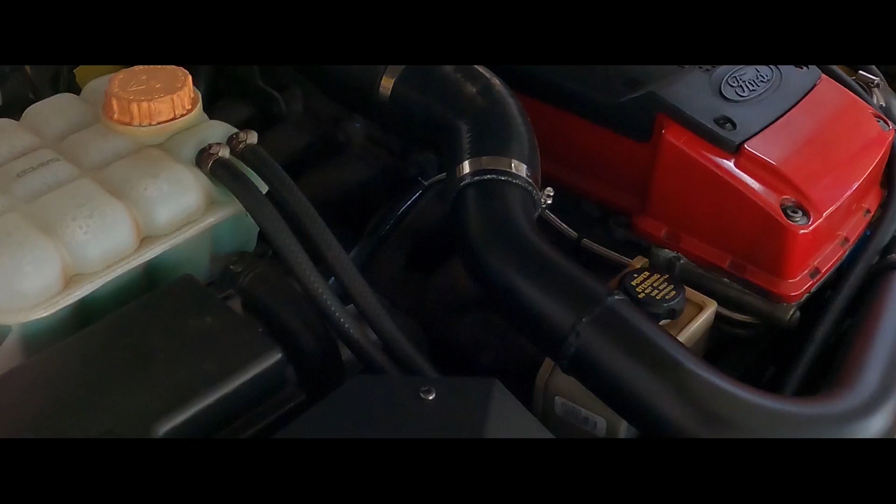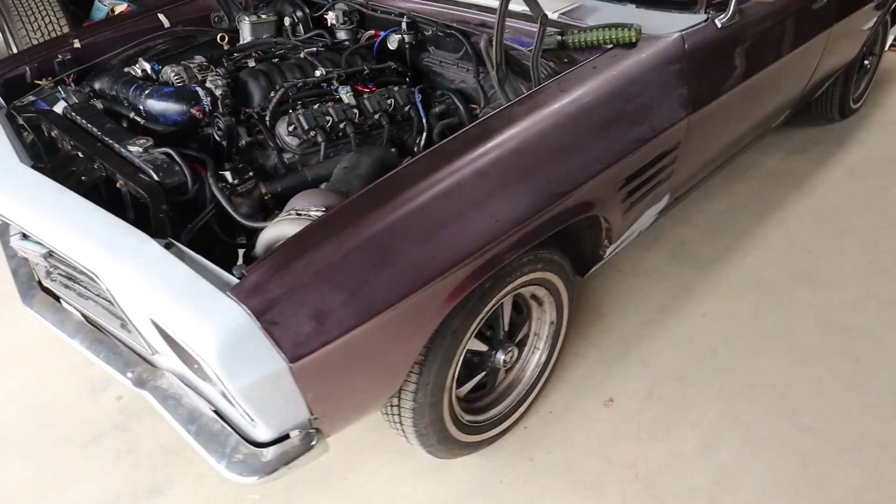Righto guys, back here this morning. As you can see, Mighty Purple's off the hoist, which is a good start. So the boys obviously had a pretty busy night and got it sorted. And here we are, ready to go on the dyno this morning.

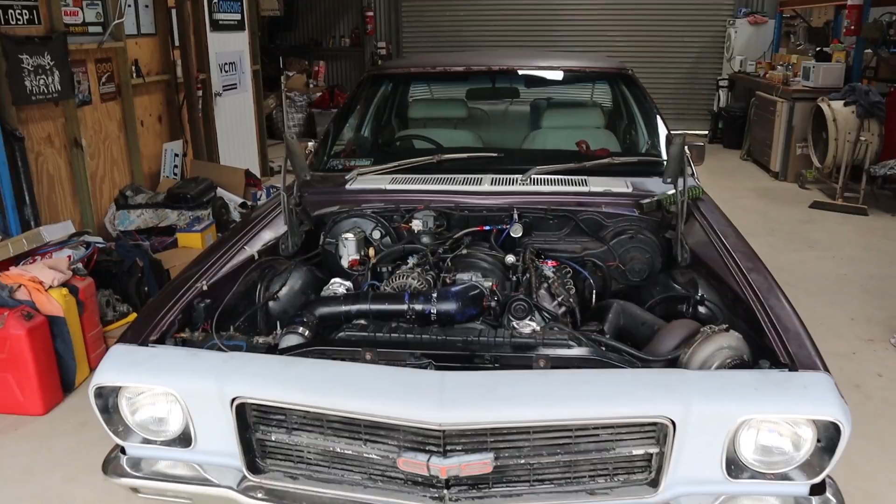Anyway, have a quick bite to eat, bit of brekkie. As you can see, it's a lovely foggy Sunday morning. Apologies to our neighbours, but unfortunately things just go the way they go sometimes. We generally are pretty good with our neighbours, very empathetic. We always only operate within a certain time frame and try to keep noise to a minimum outside of that. So it's not all bad, it just is what it is every now and then. But I'll get some footage of it doing a few runs before I head to lunch.

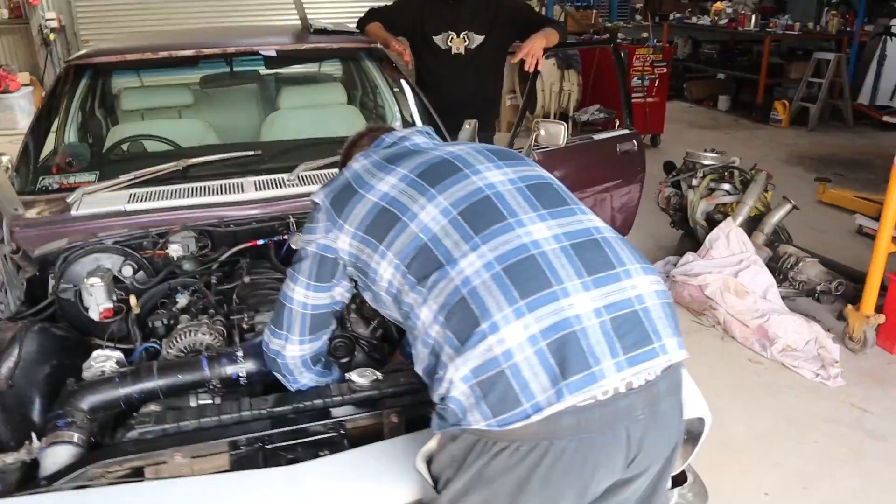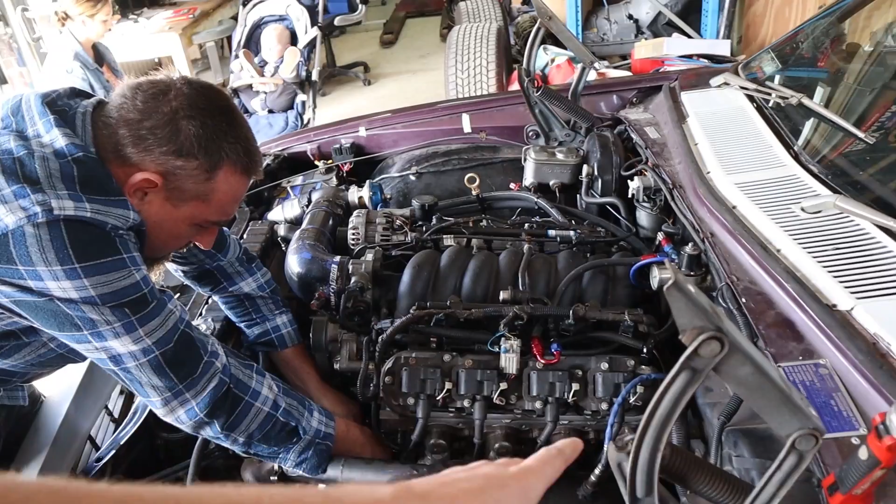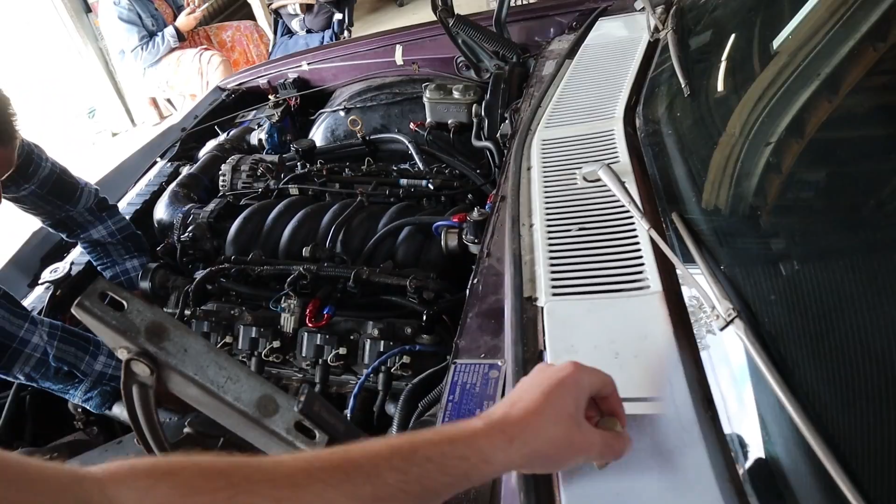Alrighty guys, so we're working through a few things with the new VZ PCM, having a few issues with things like cam signal and a few other things. We got it to start and run last night, but it's not happy, doesn't like starting. We're having a bit of trouble because it's Gen 4 - as Stuart explained at the start, we're using the front cam sensor in the front plate like a Gen 4 would, but using the LS2 early style trigger with one trigger so it will run the LS1 PCM, no worries. So just having a bit of trouble working through that stuff. The boys are working through that.

Also having a bit of trouble with the gearbox - well, not with the gearbox, just error codes. It's come up with all sorts of weird codes related to the gearbox, being 4L80. One of them for some reason is the trans range, which is basically the park, reverse, neutral - not so much the lockout, but it tells position, tells it what position it's in. And it's cracking it about that, saying it's out of range.

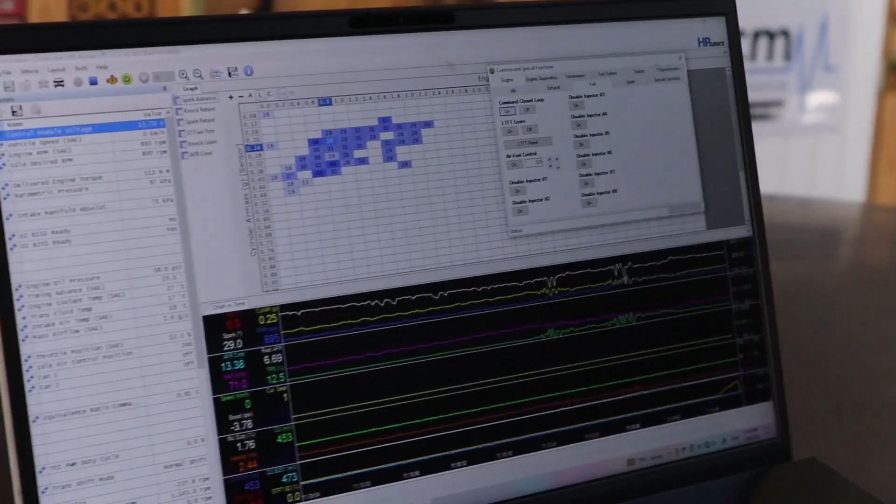Yeah, I was trying to figure out what was rattling. It was the bumper. Yeah.

This is recording, Max, because I don't know what the hell I'm doing. So here we are, just a quick update before we get it on the dyno. We've sorted out these stupid error codes. It won't do the crank CASE relearn because of some TPS issues, and basically we're at the point now where Stuart's just said, you know what, send it anyway. So that's what we're doing. We did find an old perished fuel line under the back here that feeds to the surge tank, so we've fixed a fuel leak there. We're just doing a final check on the oils, and that's it.

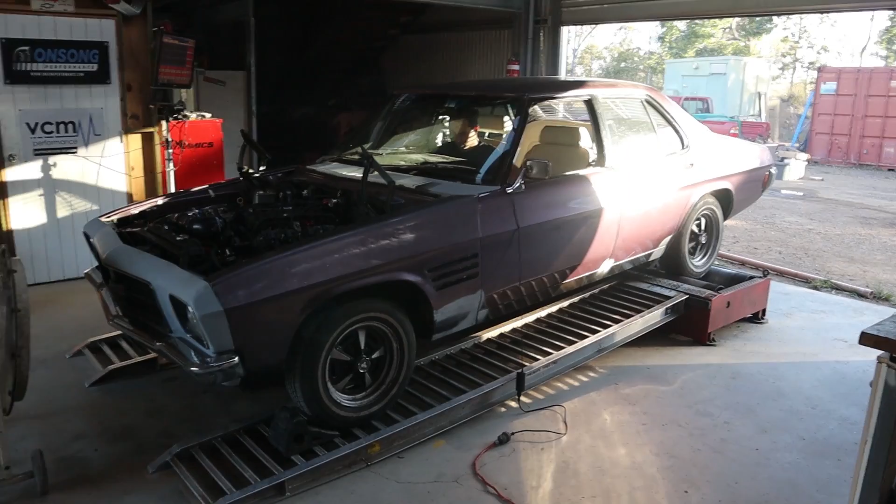Hijack the camera here, guys, Rex is just making a few changes for me on the tune. We've got a bit of oil and stuff still burning off this thing, but it'll keep doing it for a while.

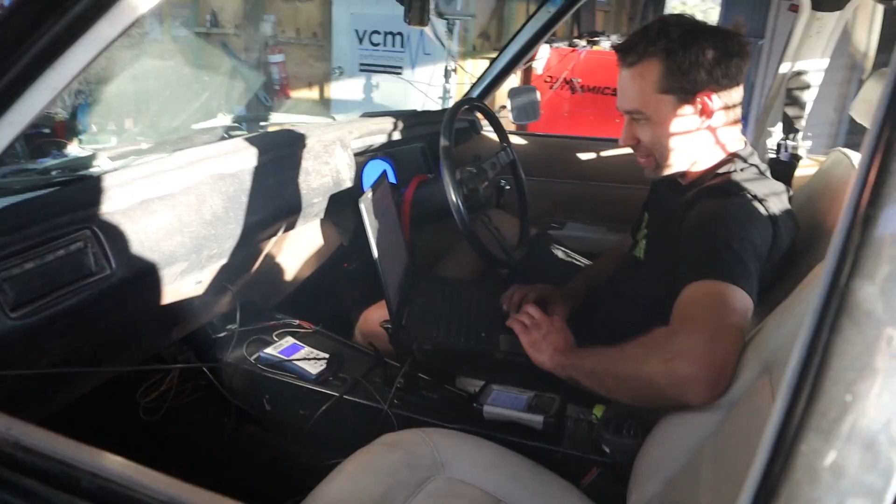Stole your camera. Hey? I stole your camera. Yeah, that'll be good. Max will be happy. I'm a bit busy. What's that? I'm a bit busy, but still in there.

Do we know what the base boost is yet? No, I saw 13.8 that time. So, creeping there, that's alright. Hopefully it tops out there. Look, as long as it's under 20 as the base boost, we're fine.

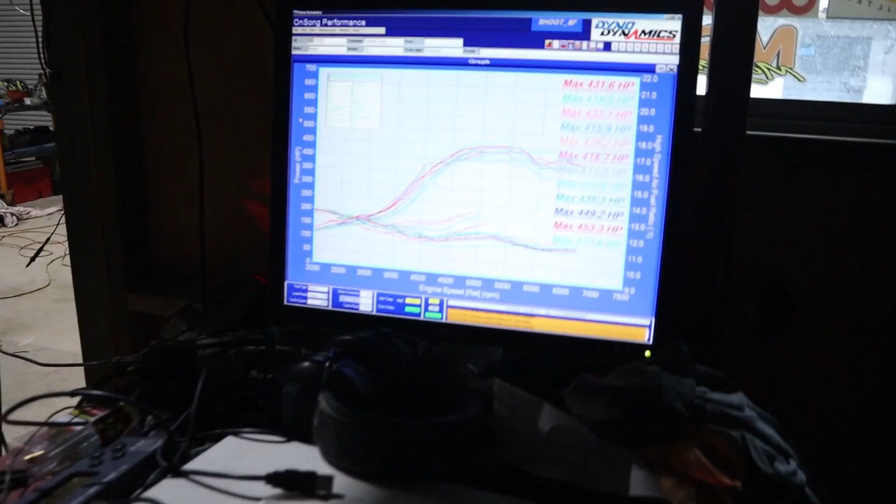So we're just throwing a couple extra degrees in it, see how that goes. At the moment it's loving it, every time we put it in there it just keeps jumping in horsepower. We've just got to do 2 runs though - one to get some temperature in it because it's such a big housing on a little motor, and then the second one gives us the power.

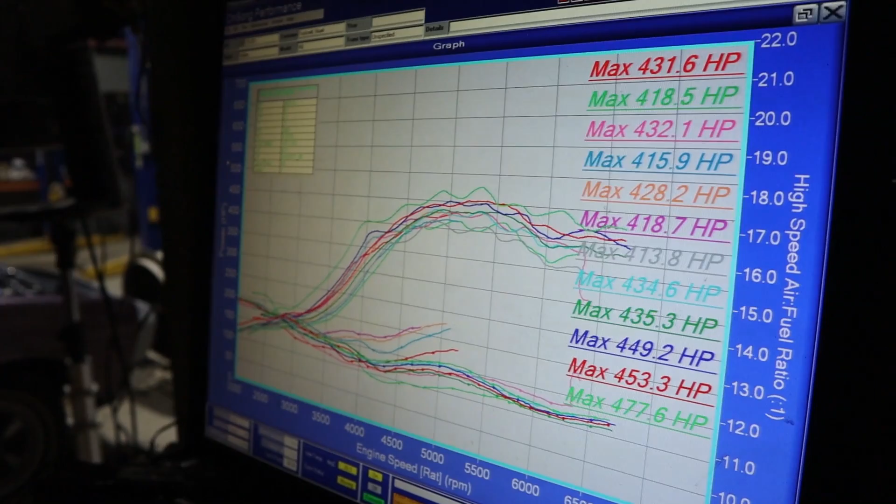We went lean. Try again.

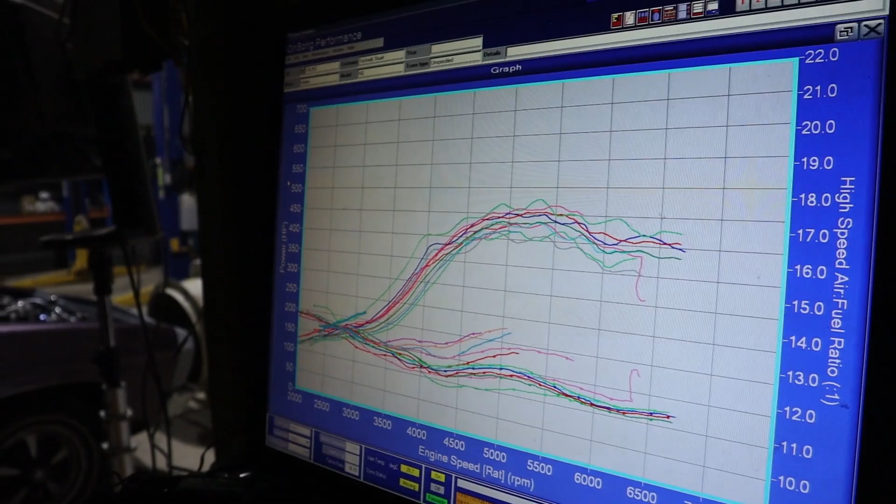Alright, here we go. I'm not sure how much you can actually see in the dark here. It's about 7:45 now on a Sunday night, so this is going to be our last ride. Just thought I'd give you a quick update - Stuart's been filming some of the runs, so here we are with our setup.

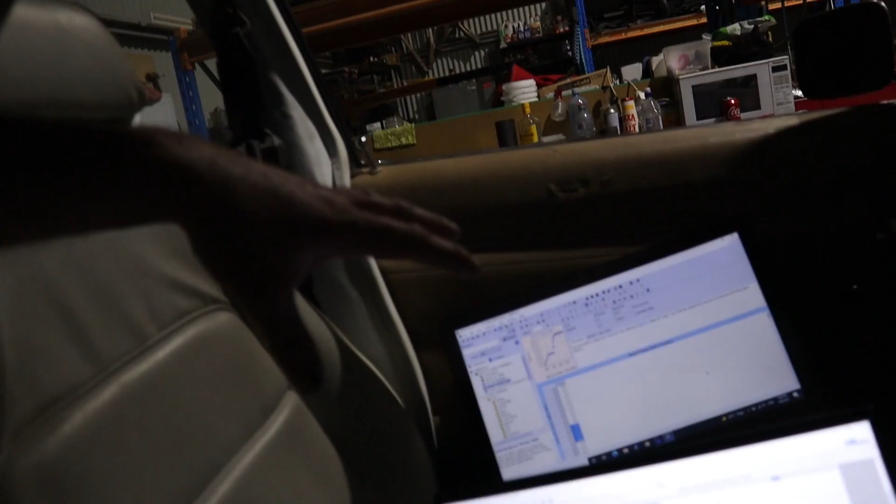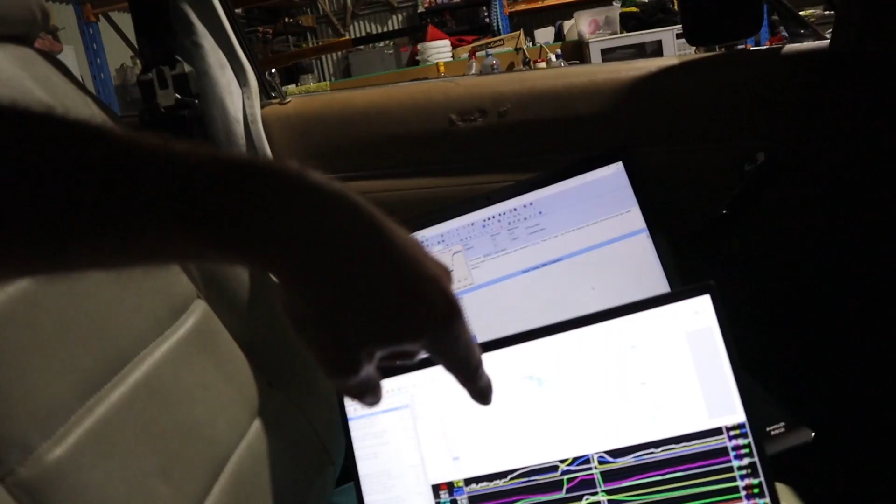It's too hard using EFI Live, trying to do - I won't go into the long version of what we're trying to do here - but it's actually worked out better for me to use our tuning software, HP Tuners, as a scanner for when we're doing runs, and just use Stuart's EFI Live to flash the tunes back in.

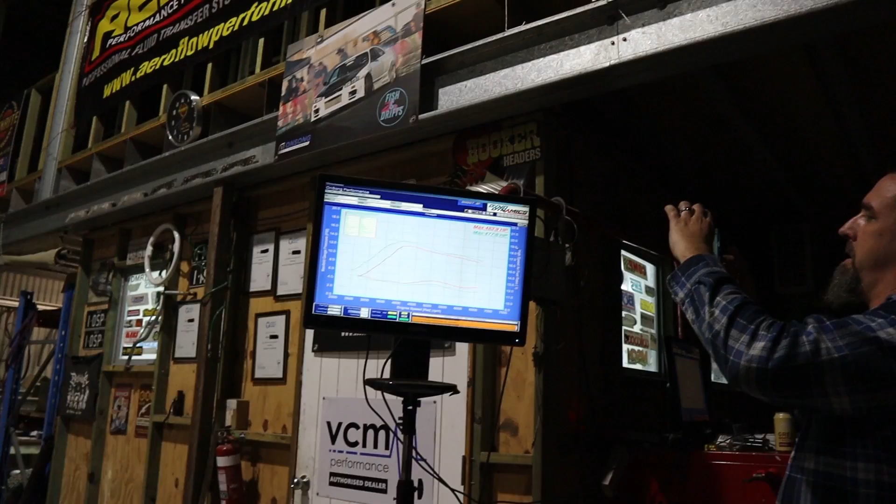Because it's late at night, we're pretty much at the point now, as you can see, our last run there - if I can work out how to zoom - the last one's the red one. There we go. So we've gone 477. That last run was 483 on less boost, which is because we started throwing timing in.

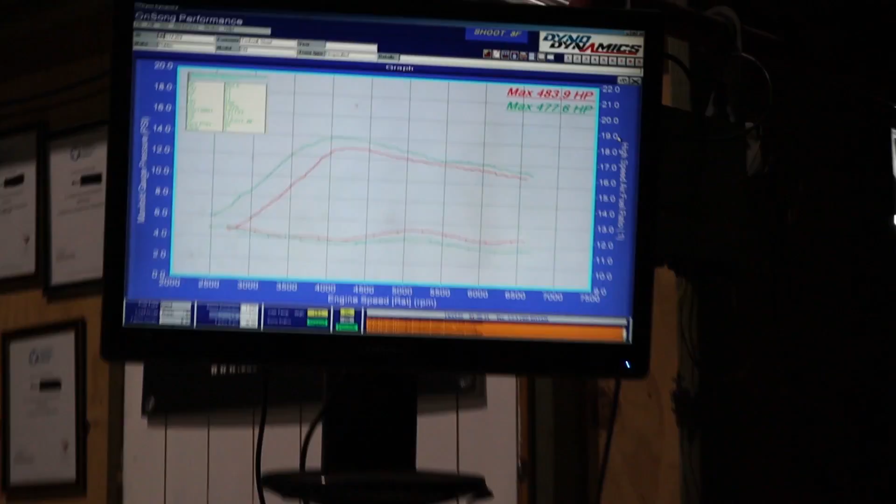As some of you might be aware, as we put timing in, the exhaust gas heat is going to drop a bit because it was quite retarded, which is why we get a bit more efficiency. So we're making more power, less boost.

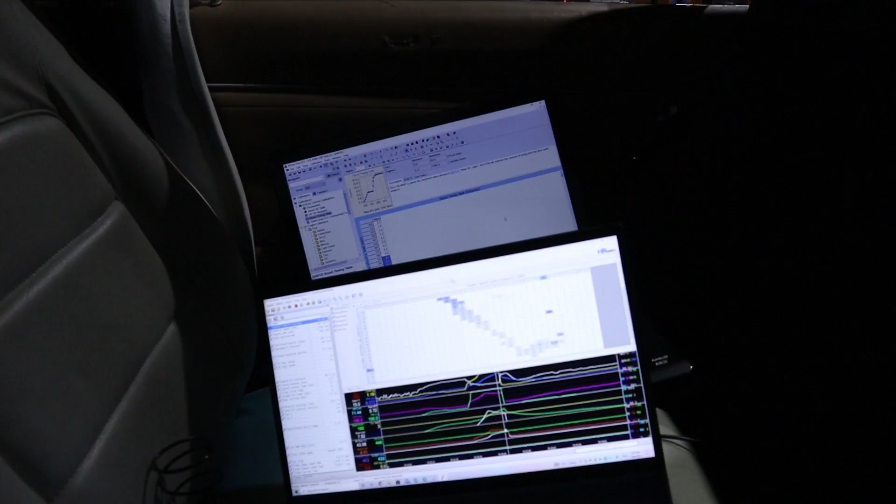Unfortunately, we're just running out of time. This is only on gate pressure. So this is going to be our last 2 runs for this time, and then Stuart will come back eventually and we will finish it off and actually lean on this thing a little bit harder. So here we go for the last couple of runs, I'll bring you along for the ride.

Hey Stewie. Hey mate, how you doing?

Alright, so I'm doing my best to film this. As you can see, there's a lot going on. We've got an onboard wideband here, I've got 2 laptops going, so I'm going to do my best while I run the dyno, and we'll try and keep this thing under control.

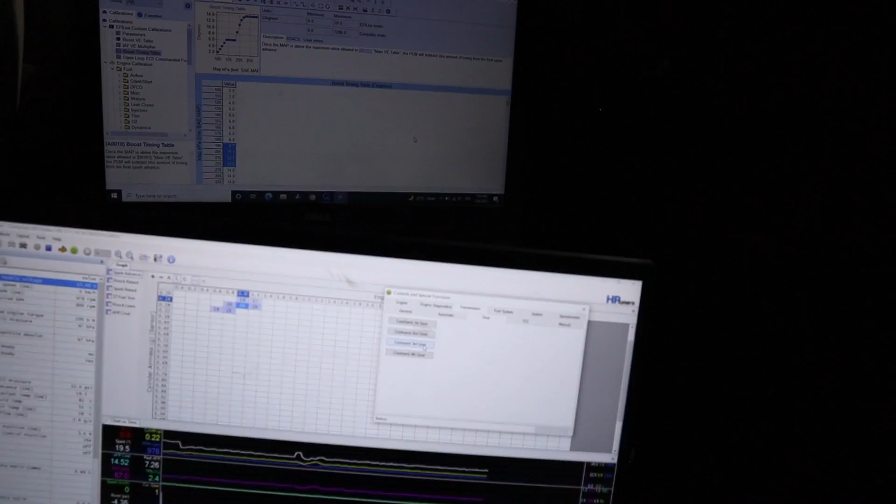So this is the main reason that I really want to use HP - being in auto and PCM control, we really want to hold this thing in 3rd gear, which is what I'm doing here. We use the scanner to actually command 3rd so it won't try to change back to 2nd at the start of our run. So this is why we got the whole double laptop setup.

So we're ready to rock and roll. Probably should just mention, as you spin the camera around, that 0 and 1 PSI oil pressure is not what really is going on - I don't think you can even see it. Yeah, don't worry about that oil pressure situation, that is not a good reflection of reality. All right, let's do this.

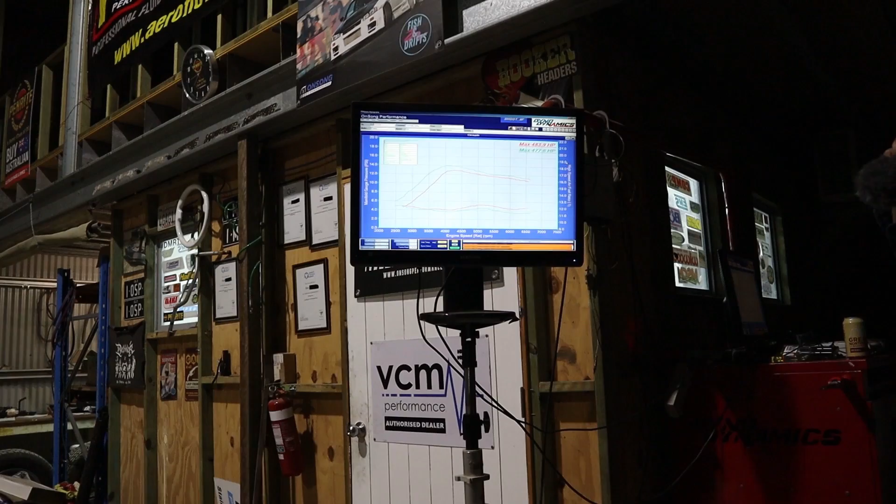Okay, so we've had a bit of a go to try and sort out this lean issue.

Yeah, but it's getting that late at night. Stewie's having a go at me because we're a bit of a backyard operation and our neighbours are going to be really upset. It's very quiet Sunday night except for us, so it's pretty much bang on 8 o'clock. This is going to be it, whatever happens in these next 2 runs.

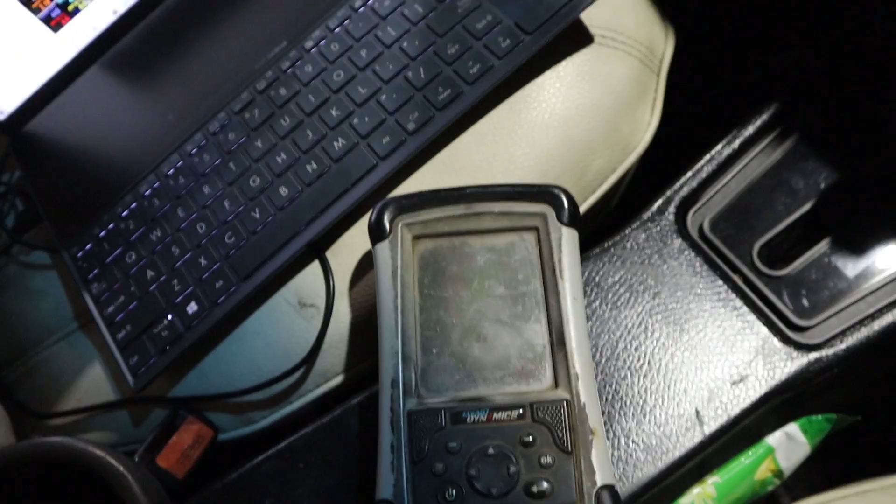Yep, let's get it. Oh, you dog! Flat battery! Damn it! Damn it! Of course it happened now. Yeah, of course. Alright, this idiot is plugged in, so let's friggin', this is it.

We'll try again. Now this is the last one. Yeah, this is actually the last one. This is the last 2 runs, period. I'm just hoping we can get these 2 in without the cops showing up, so.

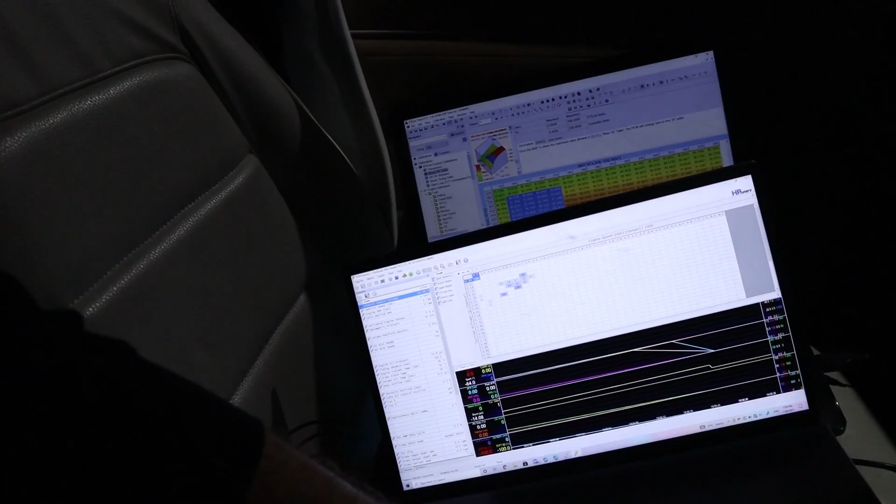Our scanner, because it's HP Tuners, has completely shit itself. Alright, we're ready to rock and roll. Let's do this.

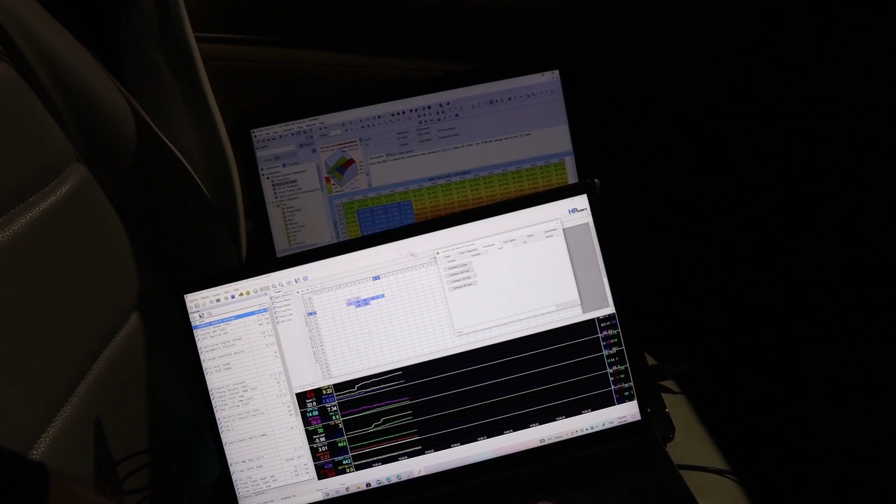Sorry if the camera's pointing in funny directions, I'm trying to do a fair bit all at once, so here we go.

Sorry, we're not going to go just yet.

Get Stuart to turn the fan on. Do my bidding, slave monkey.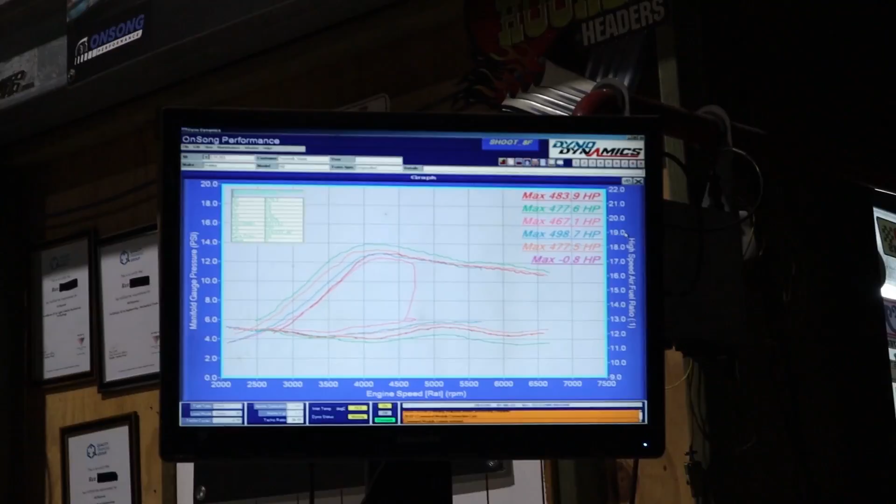Okay, now for about the 5th time, this is the actual last one. We made negative 0.8 horsepower on that run. Let's get it, see if we can improve on that. Here we go.

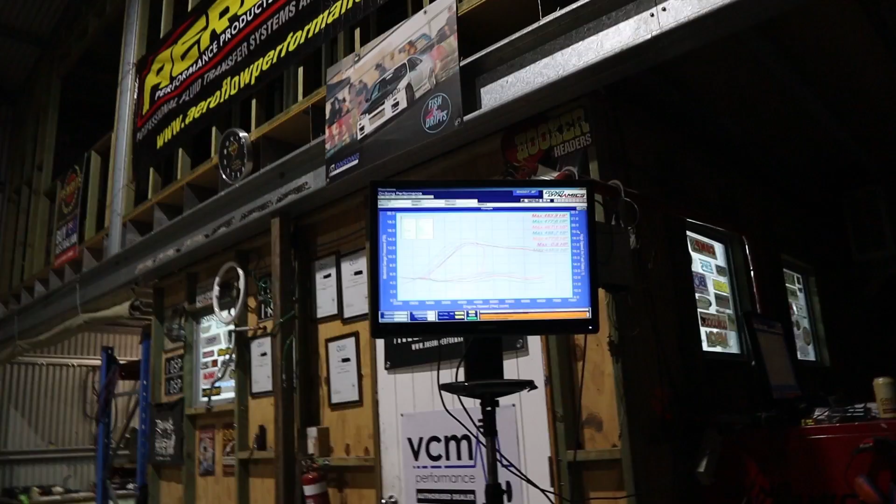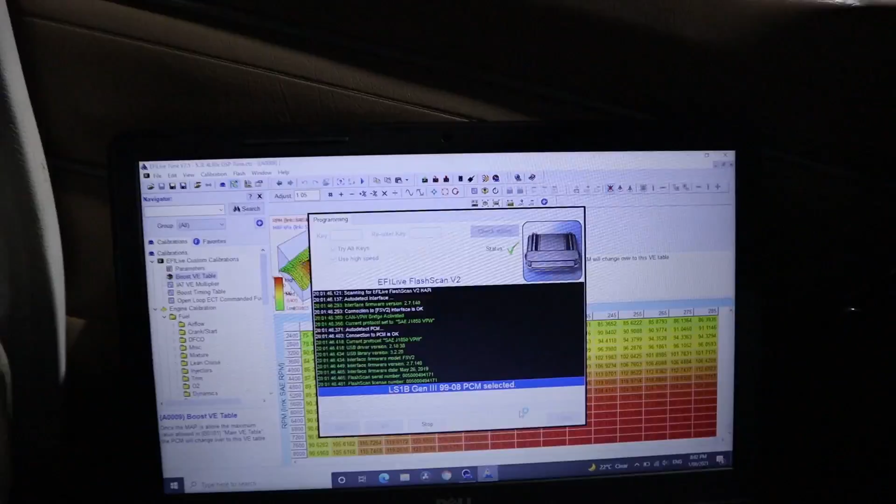Still going lean. I've said it like four times now that was the last run, but it did lean out again, and it's bothering me. So I am going to flash this one last time. I've just thrown a heap of fuel at the whole map.

I just want this thing to be safe for Stuart to take on the HQ run, and while he's gone he can revisit the fuel system and make sure it's up to scratch. Though he's been watching the fuel pressure, I'm not convinced it's actually a fuel pressure or fuel supply issue. He's just doing some funny stuff with the tune where it's coming through the maps. I don't know, we just don't have the time to keep looking at it.

We need to get this thing finished and get Stuart loaded up so he can get back to his home and his family, and we'll try again when he's got a bit more time and we're not so rushed. So I'll try one more time, one last time.

That's it, it'll be the last time soon. The last time at some point. Yeah, sometime tonight, the last time. Sometime tonight, yeah, full John Farnham spec. Oh yeah, oh alright, like the last time. This is it.

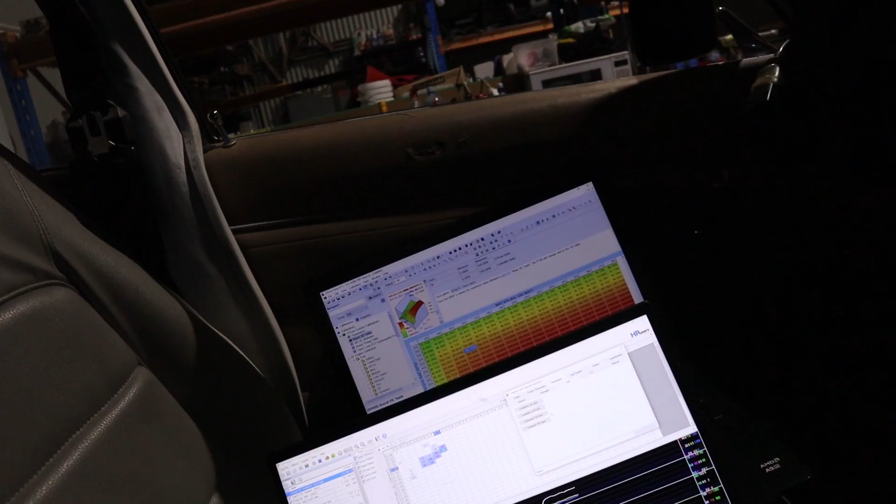Bang bang. We'll use our special features here because I'm a special guy. And third gear, so we hold our gear. Away we go.

Now that we've got some heat in the turbo, we'll do one more run as our actual baseline. Ready to go.

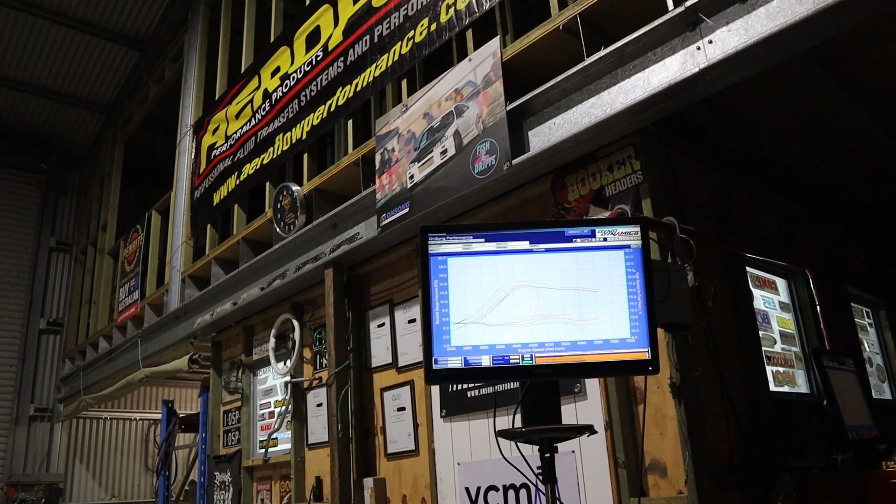That's been more like it.

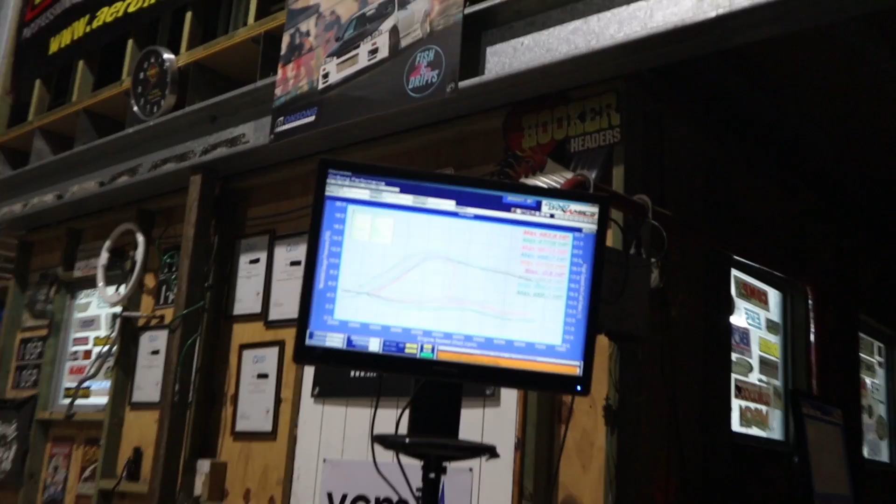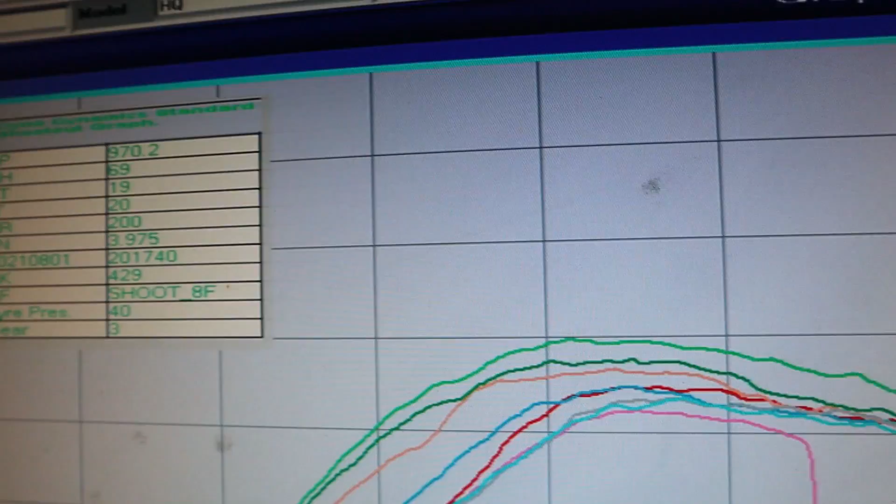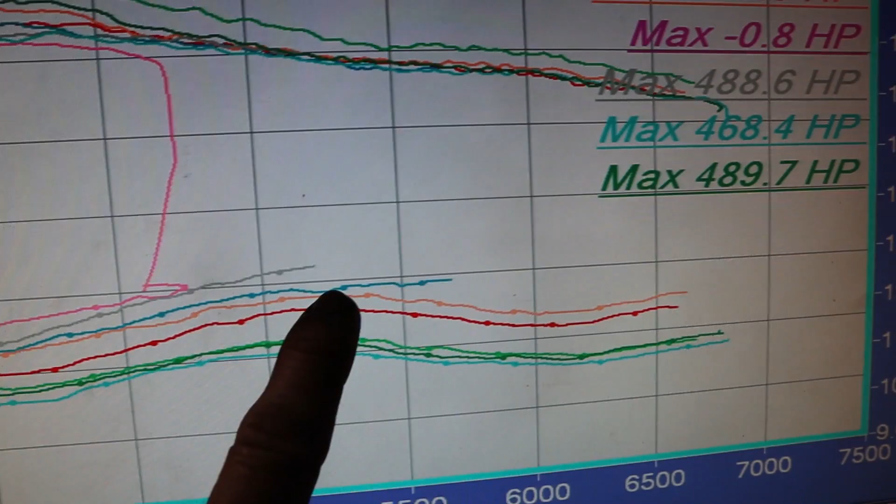489, so here we are. That last run was our 489. We did see this 498 - that was that blue boy there. This is on gauge pressure, so not power. But basically that 498 was this fella here, which made more power because it leaned out. But I aborted that run because we're up in here and we're up here, and those two are not good.

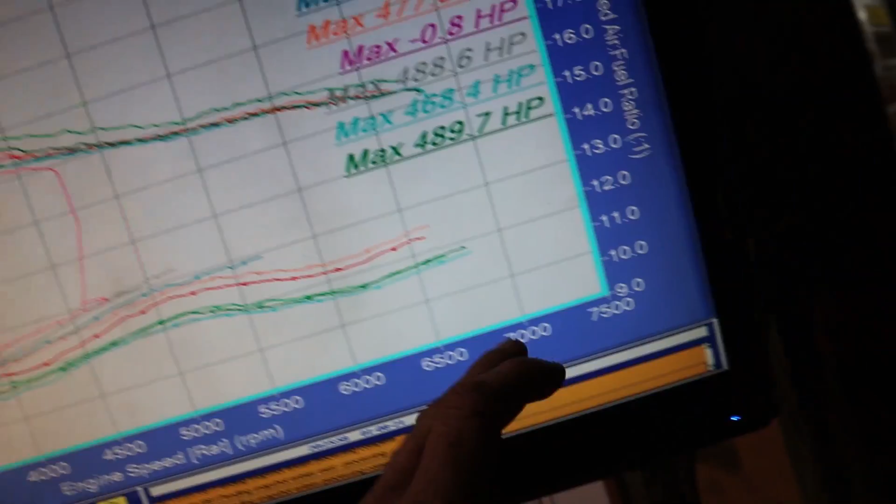So it did respond to those changes I made. The fuel now is what I'd say is a little bit on the rich side, but I'm happy just to leave it like that. We are flat out of time - it's after 8 o'clock on a Sunday. I can't believe we aren't already being yelled at. So we're just going to leave it at that.

I'm pretty happy for Stuart to take this to his HQ run, and we'll just see how it goes. He can sort out this horrendous,

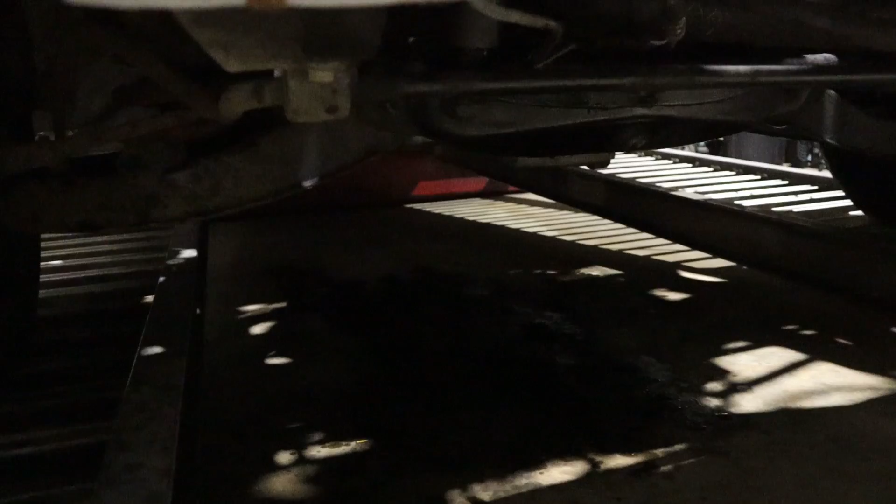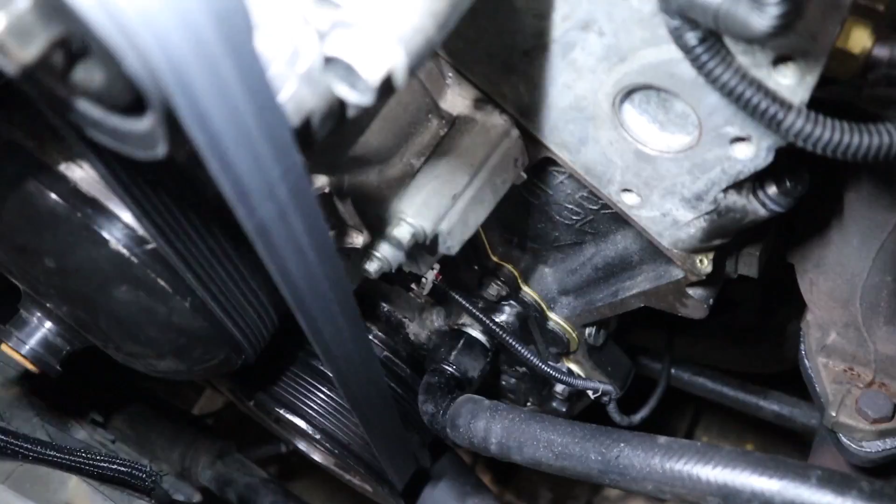horrific oil leak - looks bad. Don't know if you can see it on the camera. Oh it's just disgusting. Hang on, I'll grab a torch, because you wouldn't believe it - all of that oil is all coming from a tiny little pinhole in the turbo drain here, where the fitting's actually welded into the timing cover. There's a tiny pinhole, just some porosity in the cover that didn't quite get sorted out, and that's where all that oil's coming from.

And I tried to fix it actually the other day when we were rebuilding this engine. I tried so many times to fix it, and every time I put the welder to it, it'd fix one hole and the porosity would bring out another. I even ultra-blacked the backside thinking that should stop it, and obviously that didn't work. So Stuart's gonna fix that up, and that's where we're pretty much going to leave it for now.

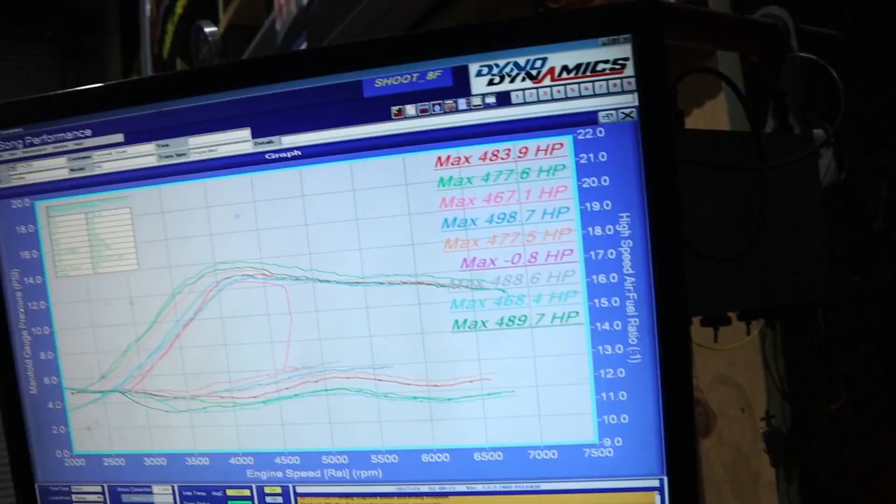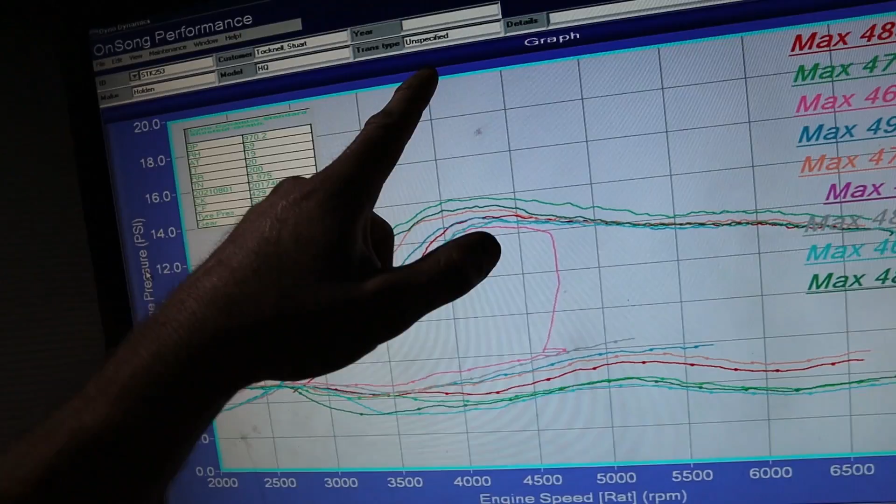So we can't wait for this thing to come back. He's going to fix up a couple of things on it, and when it comes back we'll try and get this one here, manifold gauge pressure - we'd like to see that somewhere up here.

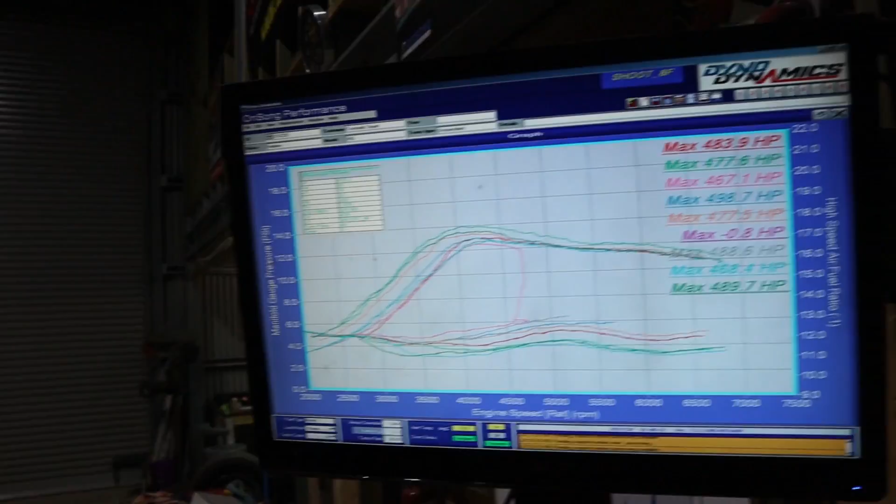Look, all in all, I think we've done well considering it came here with a broken engine. Yeah, well, we had to push it inside a couple of days ago. So it's Friday night to Sunday night - we've turned around and rebuilt the motor and got it back in the car and actually done some tuning on it to a point where it's a respectable baseline.

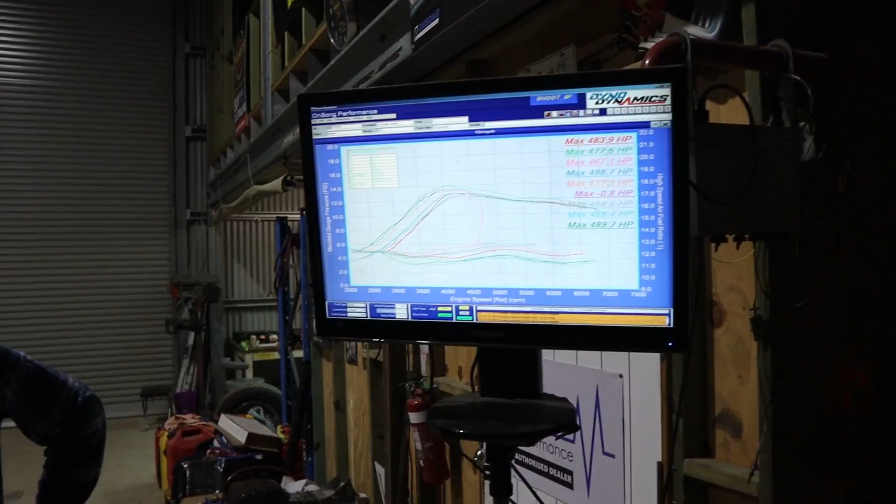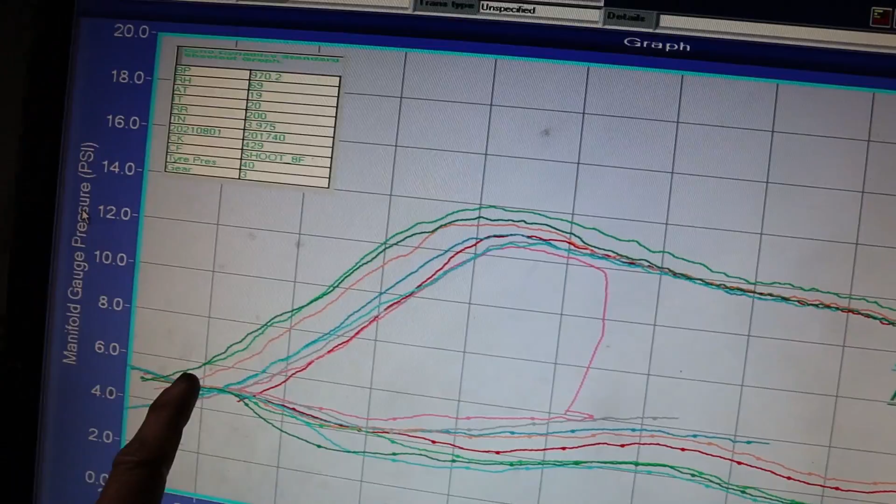And that's just on gate - I didn't even bother trying to get any more boost in it. We just sent it. Point of interest, as you might notice here, is a trend where the earlier runs, these ones, are at higher boost. And what you found - we've talked about this before - is about energy and exhaust gases.

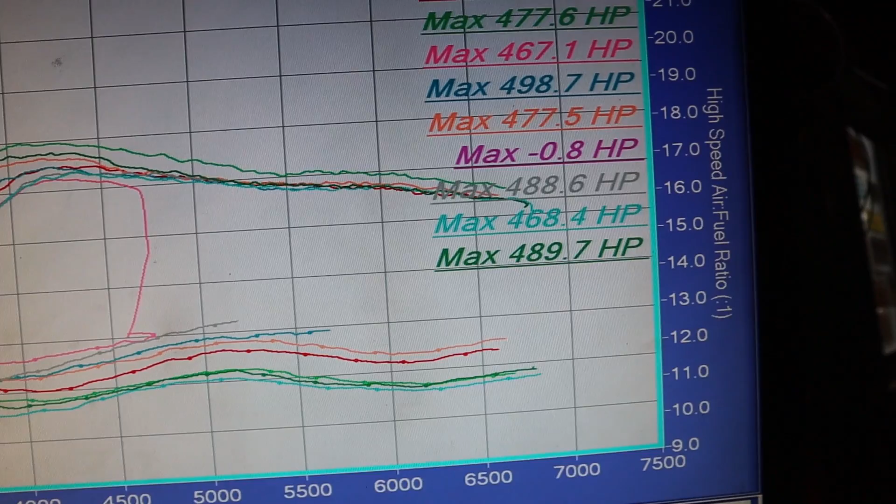For the same duty cycle, this is a wastegate spring, so there's no duty cycle at all on the controller. This is when we started putting timing in. We had our fuel fairly sorted, and we started putting timing in, and as you can see, power's going up, the boost is dropping off.

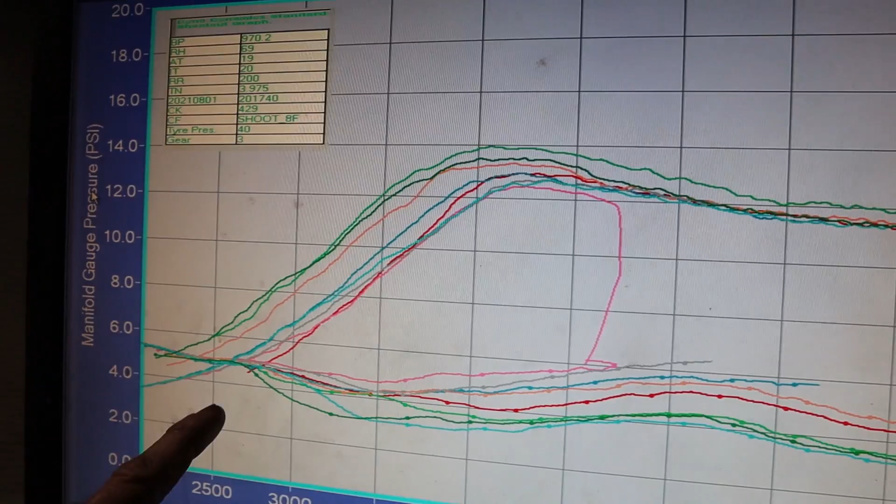What that comes down to is that because it was actually quite retarded before, Max has touched on it a few times, there's a lot of heat and energy in the exhaust gas, which is driving the turbo a lot harder. So as we're putting timing in, the engine's actually a lot happier. Exhaust gas temps are coming down, which is taking away a bit of energy to drive the turbo, even though the engine itself is actually a lot happier and is making more power.

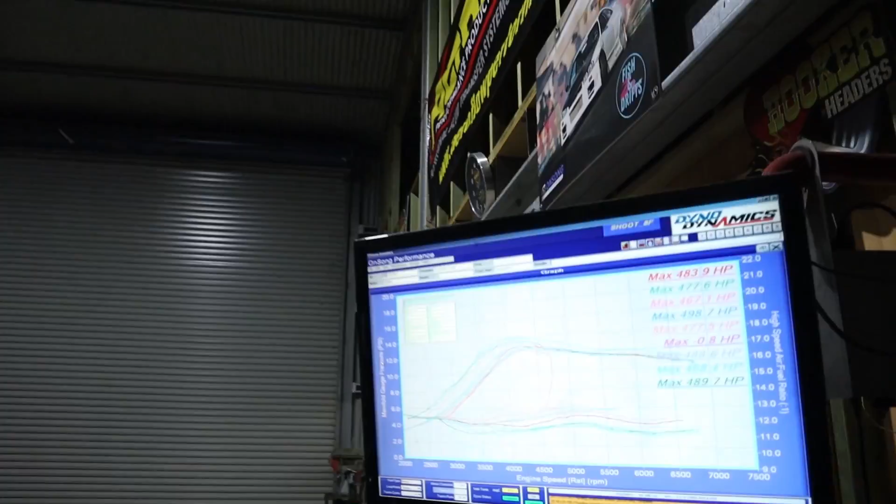So that's actually a good sign, and I believe that's what's happening, where every time we make these runs, it was starting to go leaner. It's just because it was coming through a different point in the map. Stuart's been keeping an eye on the fuel pressure. Fuel pressure's been constant, I think that's fine.

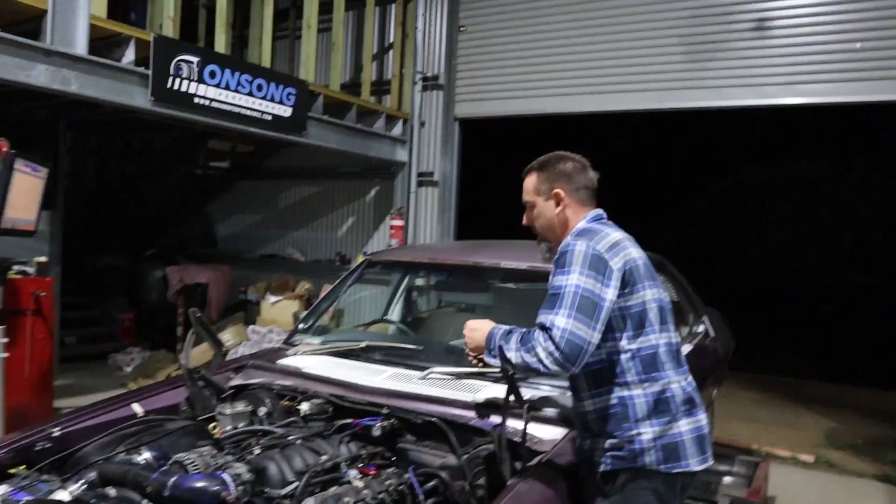Catch you later, bye. Righto guys, so back here this morning.

Rex is absolutely dead, I can't even get him out of bed. He's out of it, he's had a huge weekend. So stellar effort from the boys. It was a huge weekend, it was a huge achievement to get that thing to where it ended up.

I don't know how much Rex explained because I haven't gone through all the footage yet, but essentially what we were having problems with when I left yesterday was fuel getting too hot. Part of the reason for that was that Stuart's exhaust was pointed - it's not finished, he's only built it back to about the diff, and it's pretty much pointing straight at the fuel tank. So after a few hours of steady state with that exhaust gas heating the tank up, as well as having the pumps running, it just got the fuel that hot that it started to boil, and that's why we were having the fuel pressure issues.

So they had to do quite a bit of cooling down before going into runs to make sure the fuel was cool enough that it wasn't going to cause problems. They had to just try and work around that essentially and keep on allowing it to cool down, which is why it took such a long time to get it to where it was.

Still in the dyno after 8 o'clock last night on a Sunday night, so a huge sorry to our neighbours, very big apologies, again it's not a regular thing. I stood out on the back veranda at one point last night because Rex sent me a message, and you could hear it clear as day from where we live, which is probably a good 5k away as the crow flies. So it was pretty loud, not obnoxious from over there, it just sounded like someone was giving a V8 a boot full up the road here or something. So, apologies to the neighbours, but that's pretty much the HQ for now.